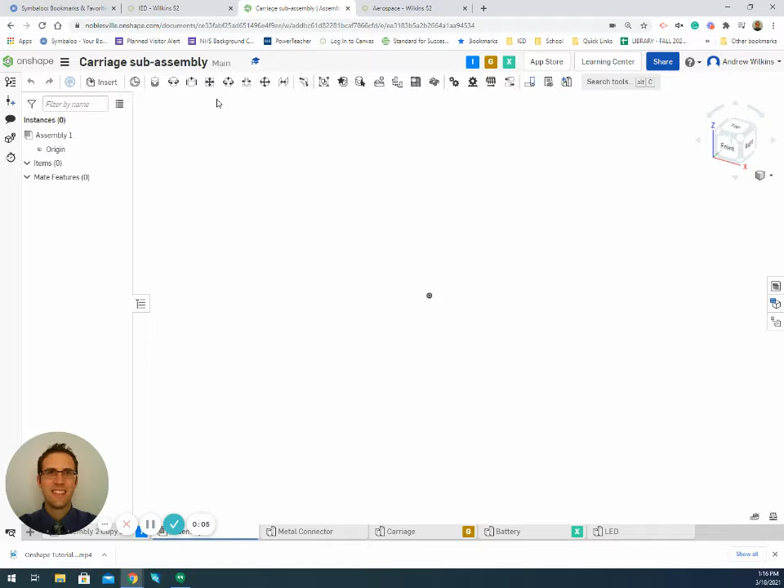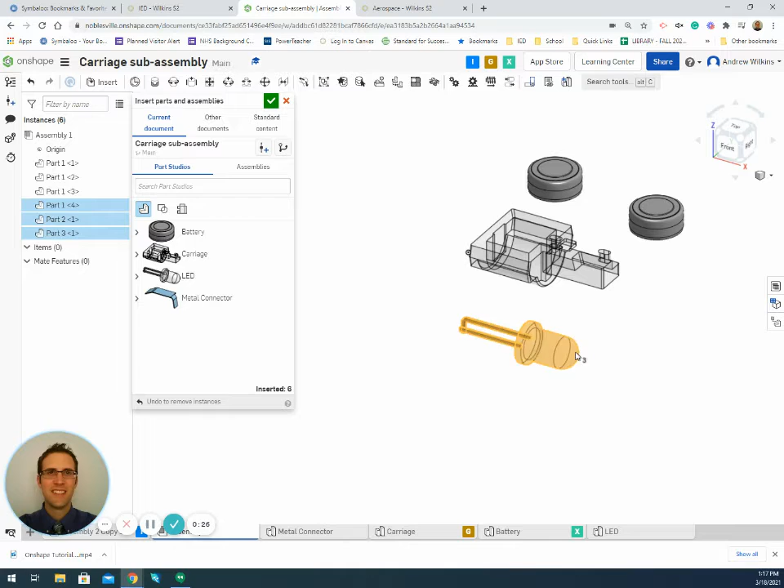Alright, so once we've started an assembly, the first thing we're going to do to get all these carriage pieces together is insert all the parts. So we've got the carriage, 2 batteries, the LED, and the metal connector.

Now I've got to hit the check mark. If I don't hit check mark, then they don't stay.

First things first, this LED that I created has multiple parts to it, it's not just one part. So if I try to move it, which I'm going to do right now, it separates off from the prongs. That's not good. So I'm going to undo that first.

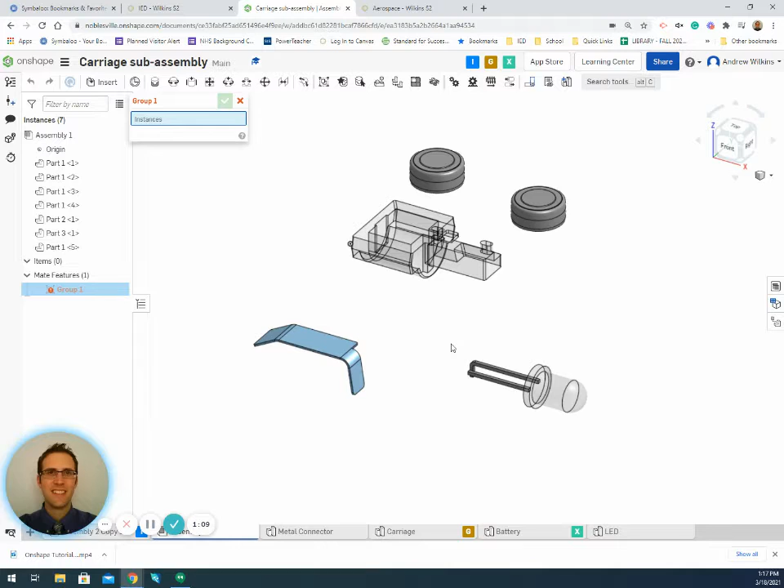And then I need to group this. You can do this with any set of objects that come in together, you can create them as a group. What it does when you create this group, it means those parts are going to stay in the same orientation to each other until you ungroup them or until you're done with the assembly. So I want all of those together the way they are. I'm going to hit check mark, and now my LED stays as one piece.

If I did that with all of the pieces, then all of the pieces would stay in that orientation they're in right now the rest of the time, like I wouldn't be able to move them. So I only want to group things that make sense.

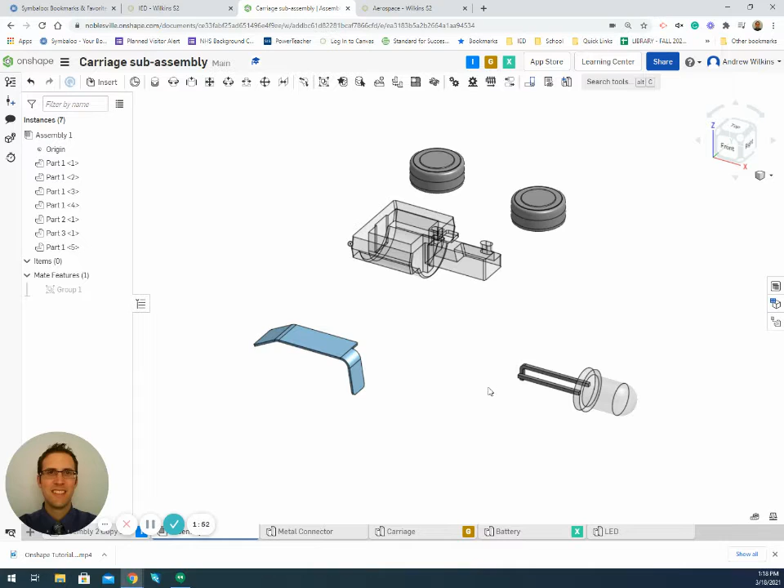Hardest part first or easiest part first? Hard part? Alright, the hard part first. That's the LED.

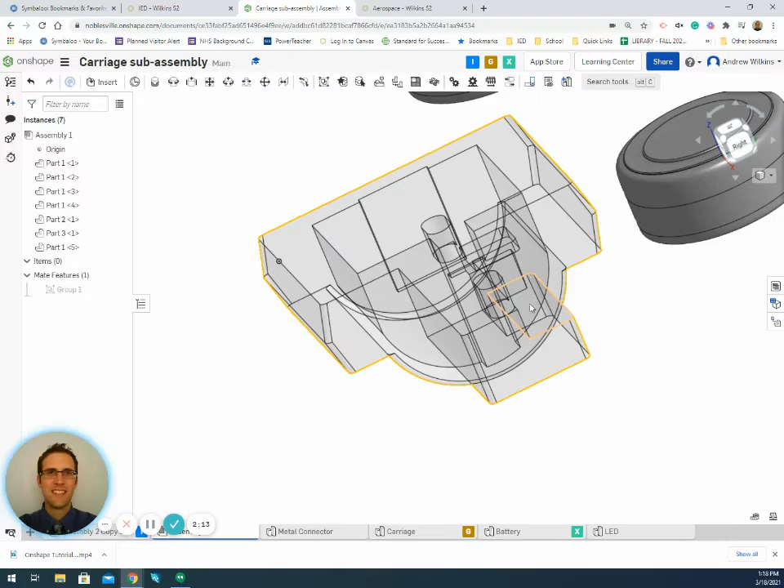So the LED basically works like this: if you look at those flashlights when you pull them apart, the smaller prong of the LED fits along this top surface of the carriage. The longer prong is along this lower surface of the carriage, and then the bent part of the lower prong goes in this channel right here so that it touches the battery. Alright, so that's kind of what's going on.

So in order for this to work correctly, especially since that LED is rotated a little bit, it's not perfectly lined up so that these two are parallel with the top surface, I'm going to use a tangent constraint.

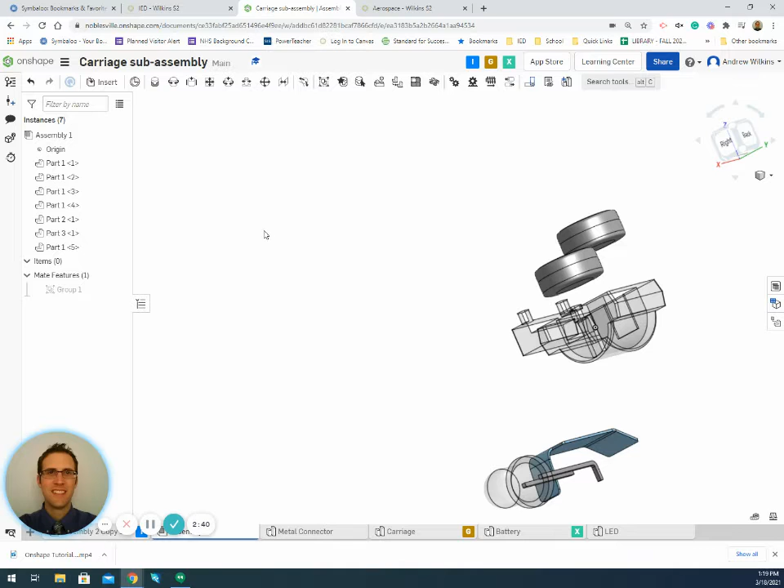So we haven't really done this before in this class. The tangent constraint is this one right here. It's a circle tangent to another part, and then it shows that you can move the circle around that piece. Alright, so I'm going to click on that.

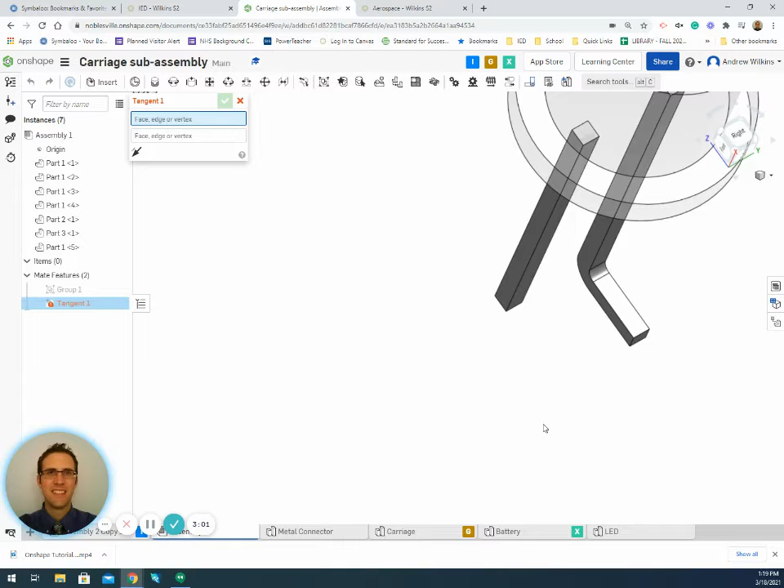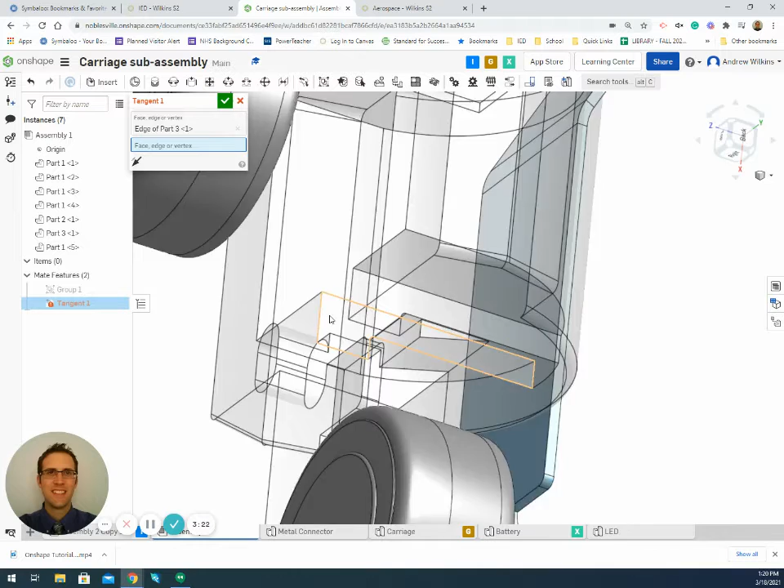And the first tangent I'm going to set up is that, and this is only by trial and error, okay? You're learning from my experience. So this edge right here is going to basically be limited by and ride alongside this interior wall right here of the carriage, so I'm going to click that as well.

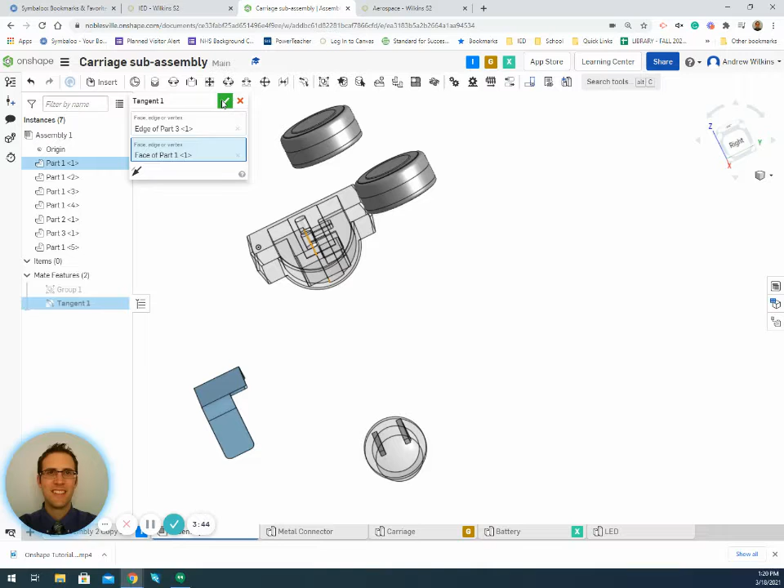So I clicked the edge and I clicked that, and now those two are oriented tangent to each other. Now right now it's like, oh, that doesn't really look like anything happened. And you're kind of right, because when I do tangent, it's not locked into this surface that's right here, it's locked into the plane that makes up that surface. So it can go anywhere on that whole plane.

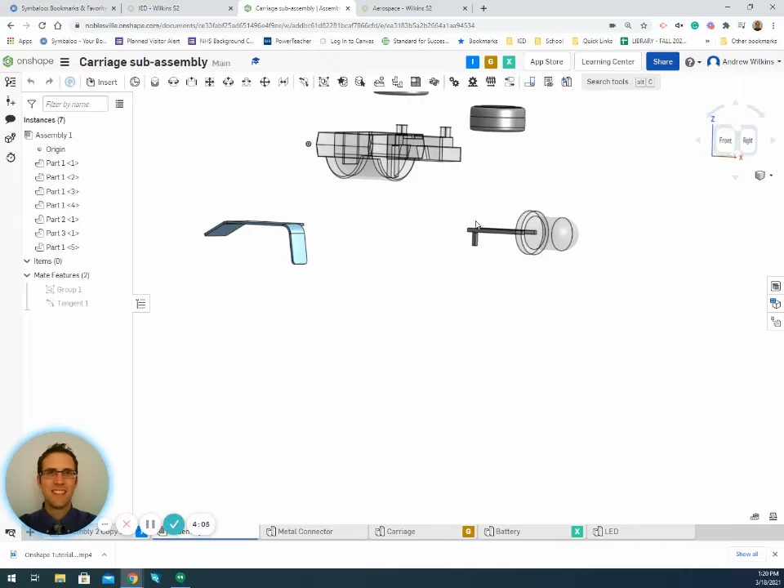I can move that edge. Alright, so if I were to literally grab this edge right here and move it places, it's moving all over the place, but it's staying tangent to that plane that that part was on.

Now, the other thing I forgot to do that's going to be really important is I'm going to fix this carriage in space. So I'm going to right-click and click Fix. That way the carriage doesn't move, and so I don't have the carriage moving every time I try to move something else. Okay, so that was my first tangent.

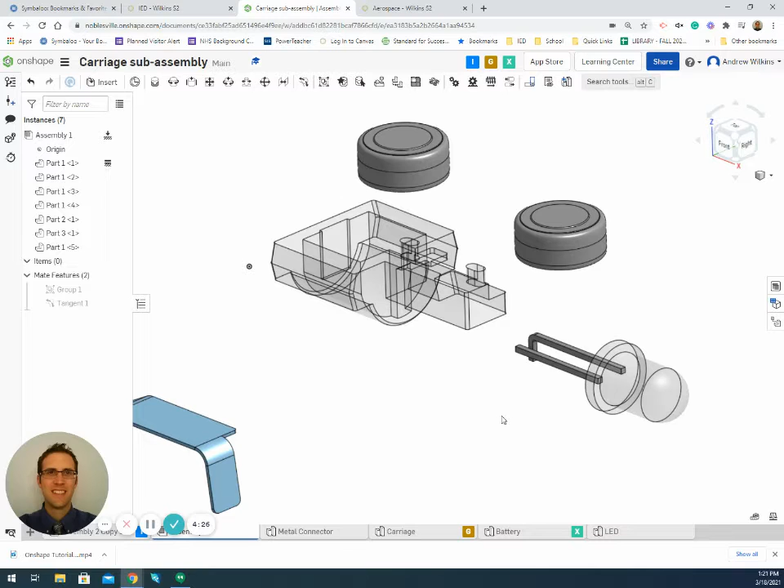Doesn't look like it did a whole lot. My next one is going to be, again, this is going to be rotated a little bit. So this bottom edge right there is going to rest on the top edge up here, so I'm going to do that tangent.

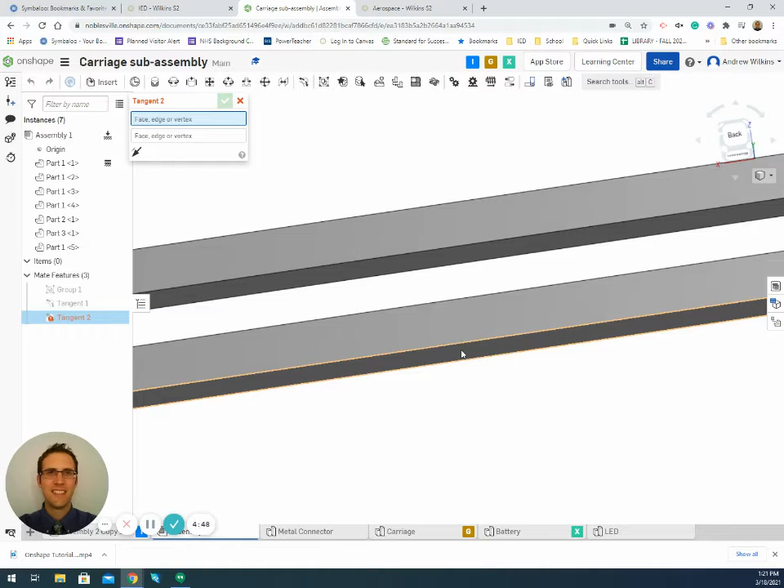So tangent constraint: this bottom inside edge of that LED prong is going to rest on the top surface of that. And once again, it's just making sure it's attached to the plane. So far it's doing what it's supposed to do.

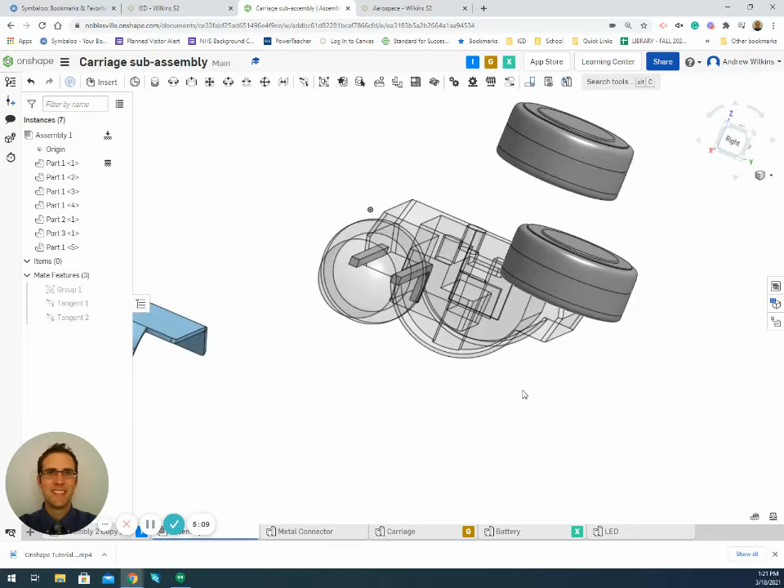Now if I try to move this, you see there's a rotation that starts to happen. That part's trying to stay tangent to those two things at the same time, so it has a little bit more limited movement basically.

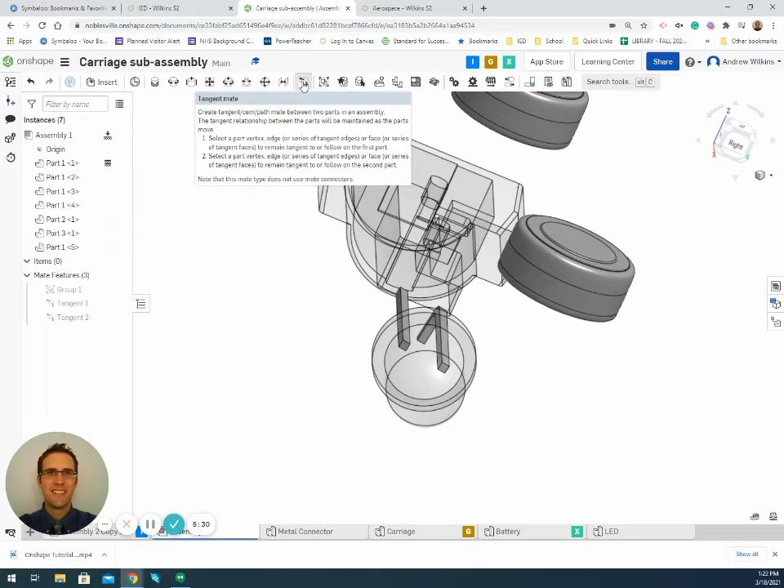So then the third constraint is another tangent, and this tangent is my outside bottom surface of this longer bent prong. So that edge right there needs to rest on this bottom edge down here.

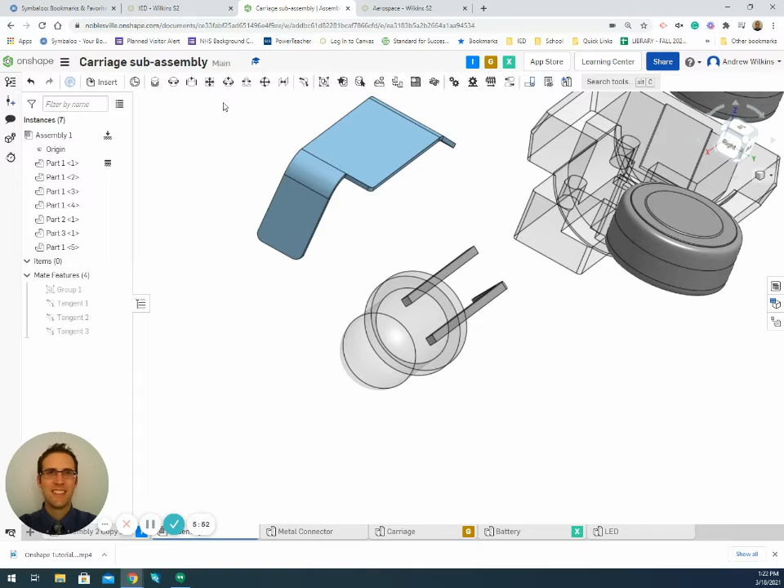I'll hit check mark, and now what you'll notice is that at this point, the only way this can go is forward and back. I can't really move it to the right or to the left. I'm trying to, but it's not, because it's lined up on all those surfaces.

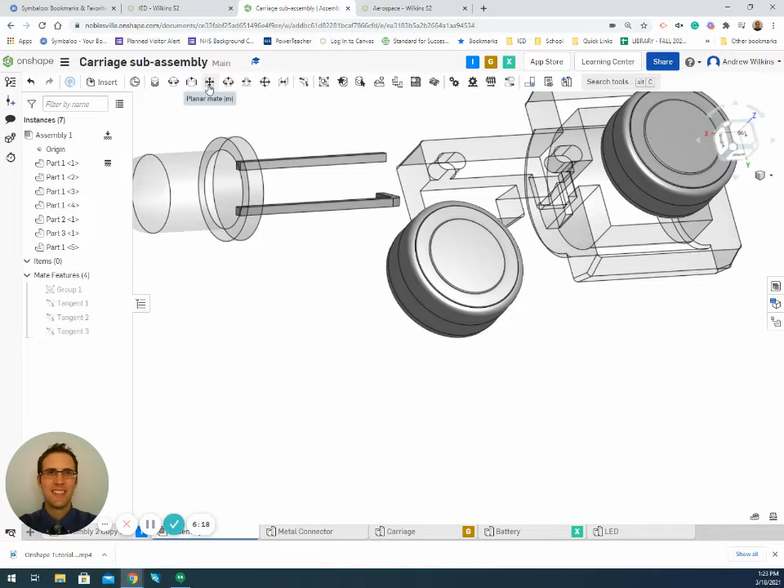So that's great. The last thing I need to do is make sure that this back end aligns with the front end of my carriage. So to do that, I'm going to do a planar mate, and I want the back plane of the LED to line up with the front plane of the carriage.

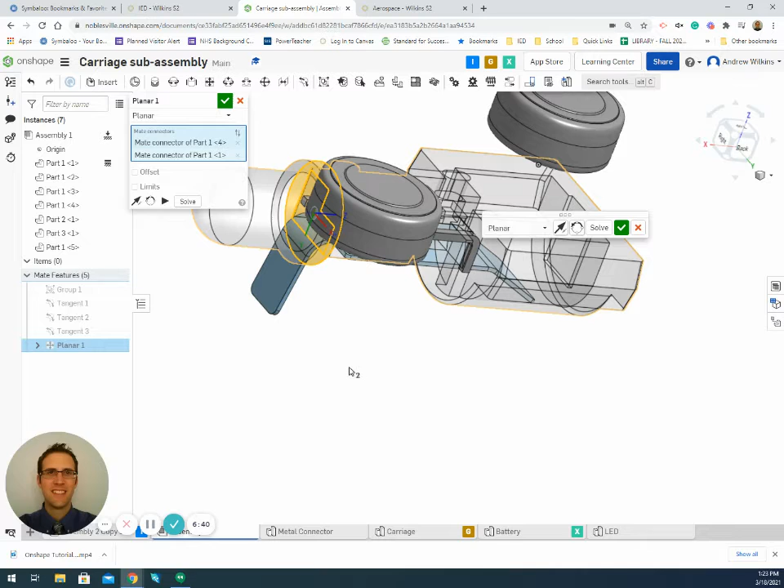Now when I first do it, it's going to drop it down there like I didn't have any tangent constraints before, which I totally did. See, they're all not really operating. But as soon as I hit the check mark, it'll recognize, okay, you had all those other constraints too. So now they're all in there.

That's the LED. Like I said, that was the most difficult one. That took a lot of me trying to figure things out.

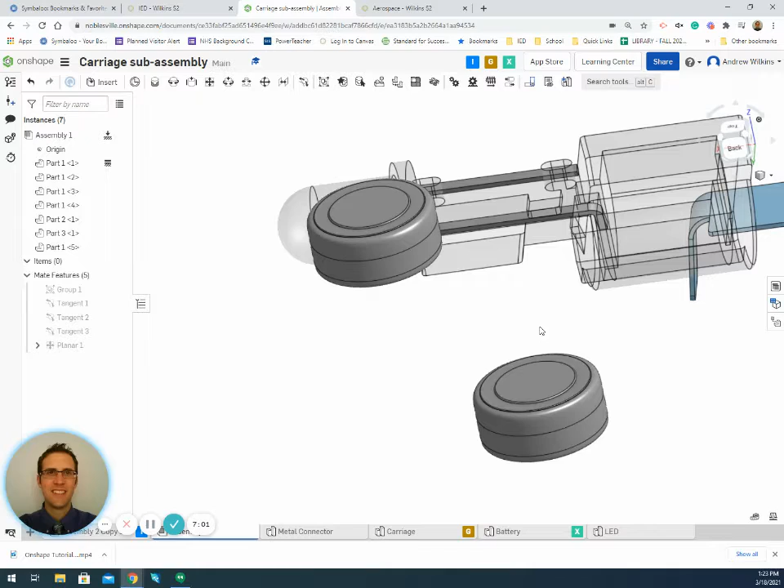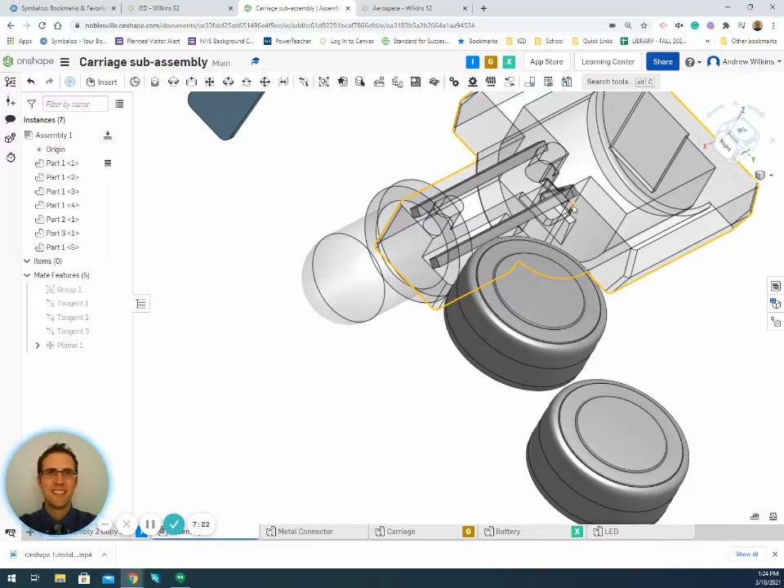What I will also say for that LED is that it's likely I would have to adjust some of the dimensions on it so it doesn't interfere or accidentally dip into the carriage. Right now it's kind of dipping into the carriage a little bit, and I'll show you how you can tell that more easily later during this. But for now, that looks really good.

So if I looked at that from this point of view, I'd say awesome job, and that's going to be good enough for what we're doing this time, for our project. But because I need to make sure things are really good, I worked on making them really good and making sure there is no interference.

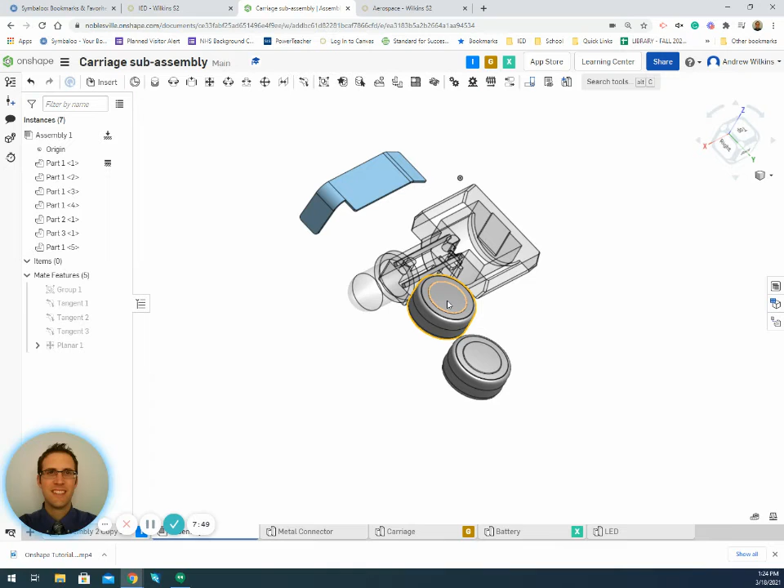All right, so batteries. If you pay attention to them, the smaller part, this part right here, is towards the front, and the larger part is towards the back of the carriage.

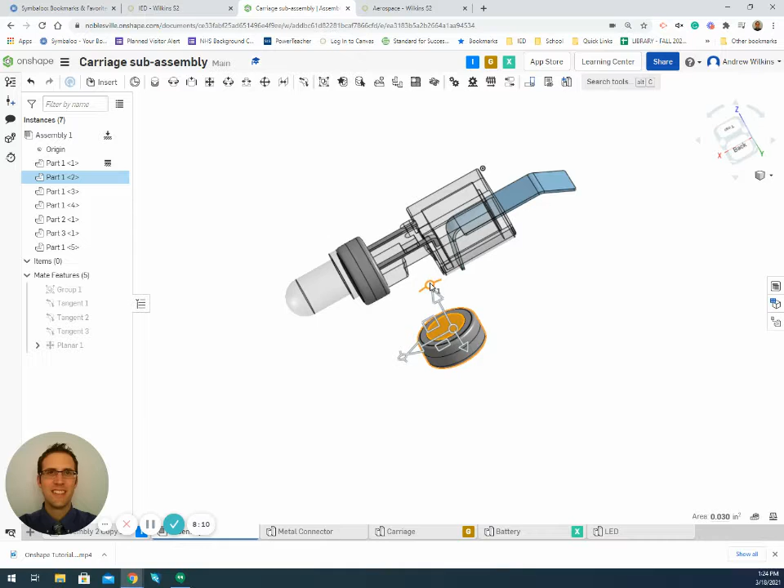So the first thing I'm going to do with these is click on them and reorient them so that they're set up that direction. That way when I go to move them, it's not as brutal when it's trying to set my constraints. So I move those, we're good.

All right, so for the batteries, what we're going to do is line up this first one. The first thing we're going to do is make sure it's all the way against this back panel. Not this one, because that's where the connector goes, but this one.

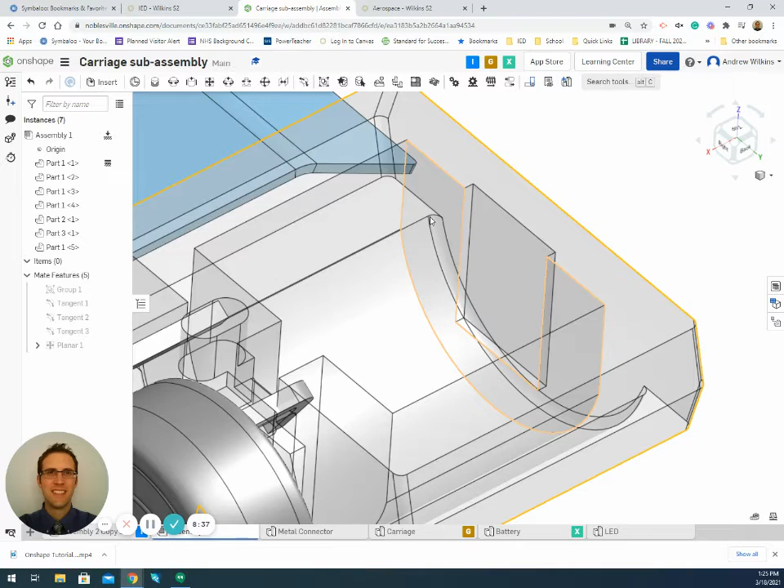So I'm going to do a planar mate on that. Planar mate, I'm going to click on this, and then I'm going to click on this. Now the reason I'm not doing a fastened mate is because a fastened mate makes the connectors perfectly aligned with each other, and I don't want that to be true.

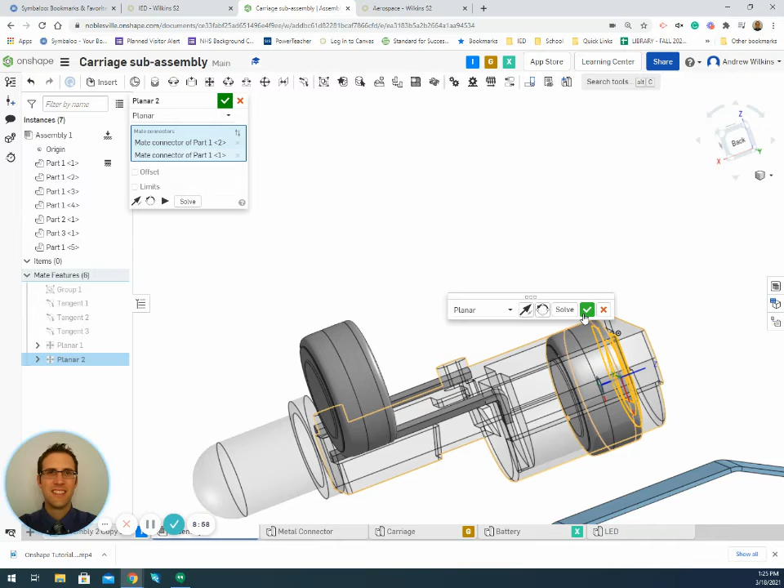I want this to be able to line up with the bottom of my carriage, and the only way I'm going to be able to do that is to make it a planar mate right now, which means it can go anywhere against that plane, even through the object. And then we're going to use the tangent again.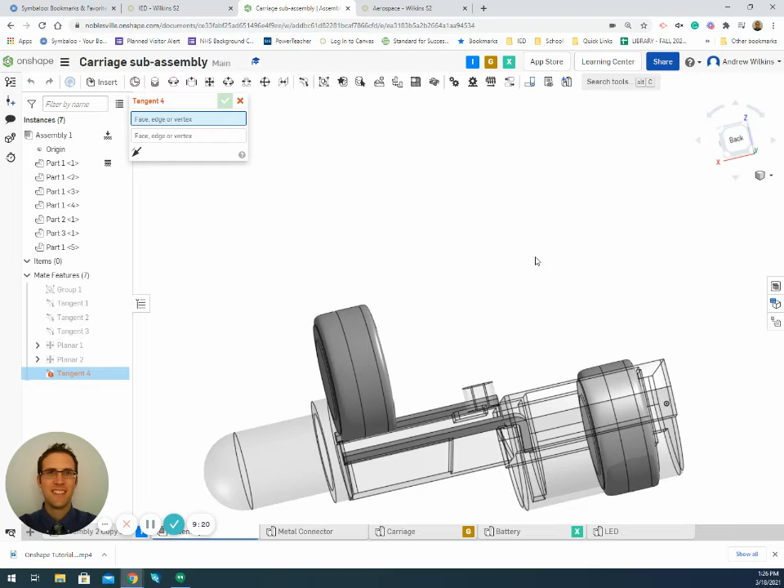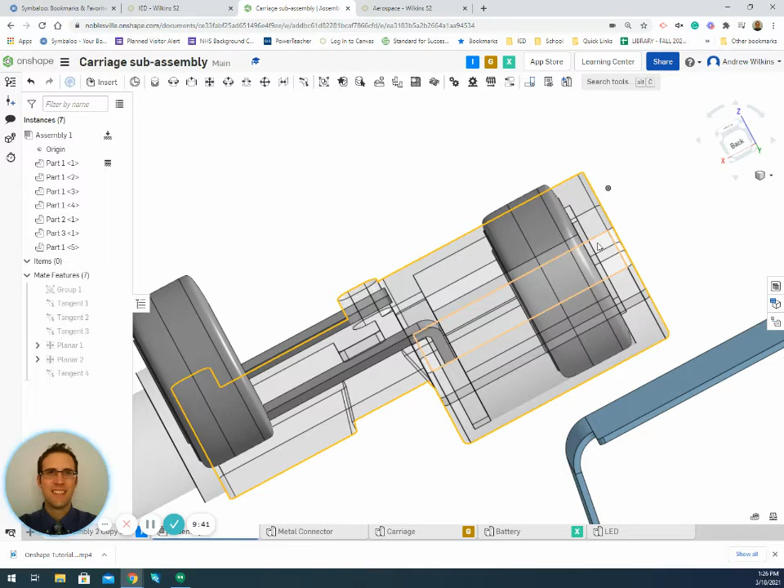So I'm going to go to the tangent mate, and I'm going to click on the part of my surface that's cylindrical, which is this part right here. I'm going to click on that surface, and then inside the carriage, I'm going to click on this bottom surface right here. So now, when I made those two tangent, it won't move off of this plane, and it also needs to stay tangent to that bottom surface. Well, I say the bottom surface, but it's the whole curved surface right here, so it has a little bit of wiggle room, but it's not really going anywhere.

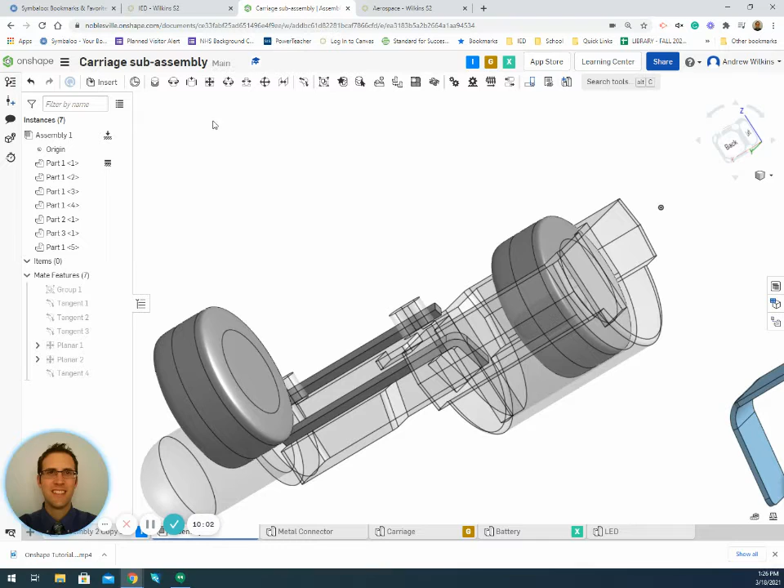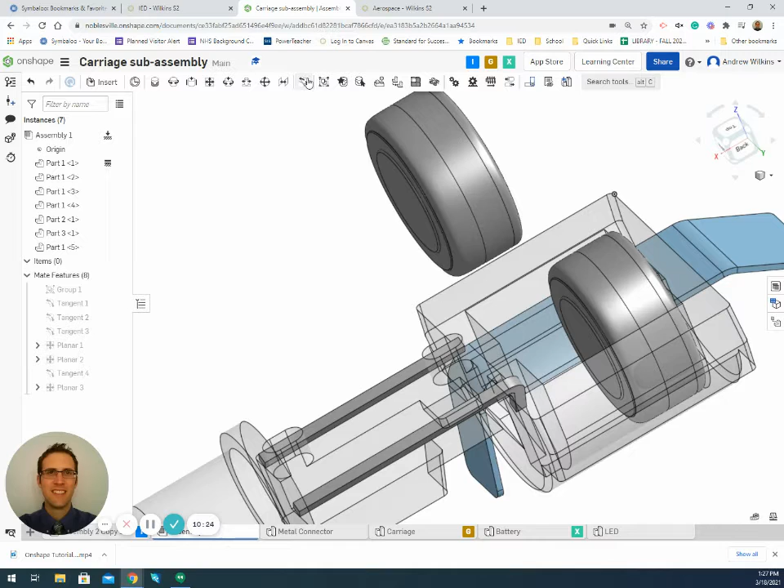All right, and then I'm going to do a similar thing with this battery. So for the other battery, I'm going to do a planar mate on, let me make sure. Yep, so that surface attached to the negative part of the other battery. Hit check mark on that. And then also make sure that I have a tangent constraint on that battery and the inside surface.

So now those two have, again, a little bit of wiggle room, but that's about it. They're staying there. If I look closely at my connector of the LED, it looks like it's touching that battery. That's kind of good.

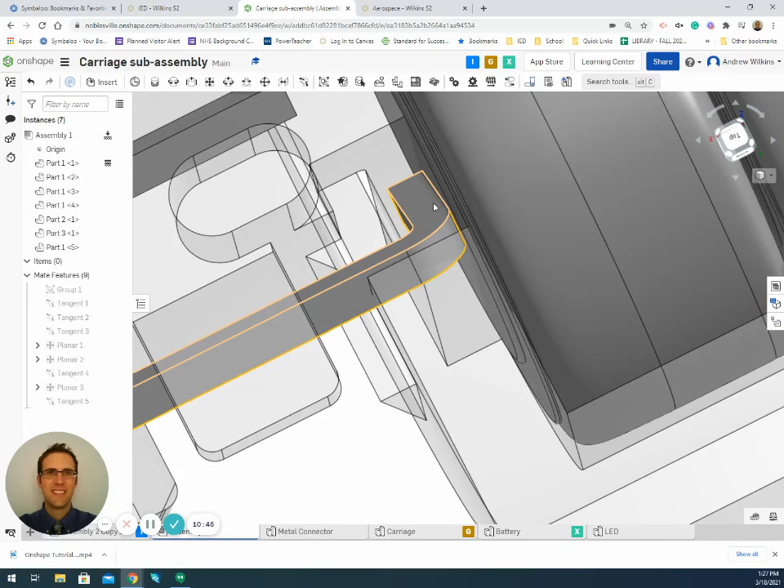All right, now some of that was I edited my battery to fit there. All right, so actually, or my LED, so I actually had to work a little bit on that.

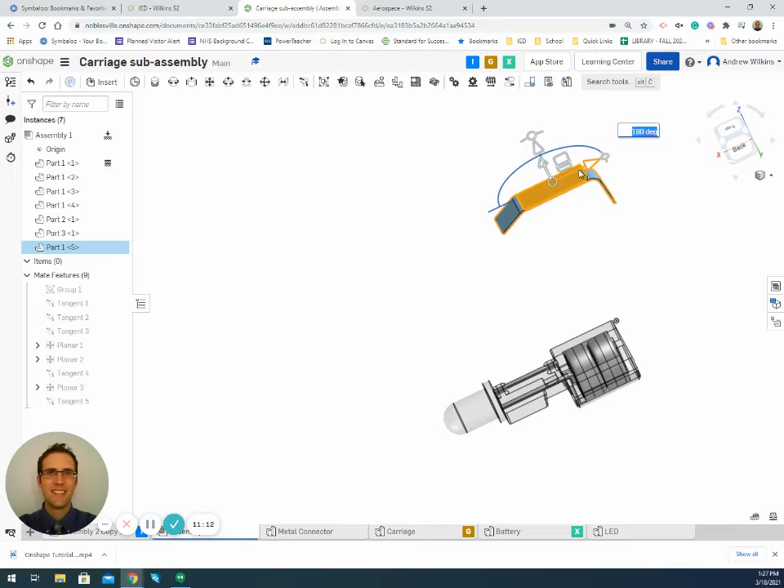All right, last one, this piece right here, metal connector. I'm going to rotate it so that it's oriented kind of the right way, like that. And then, sorry, I'm just going to do this.

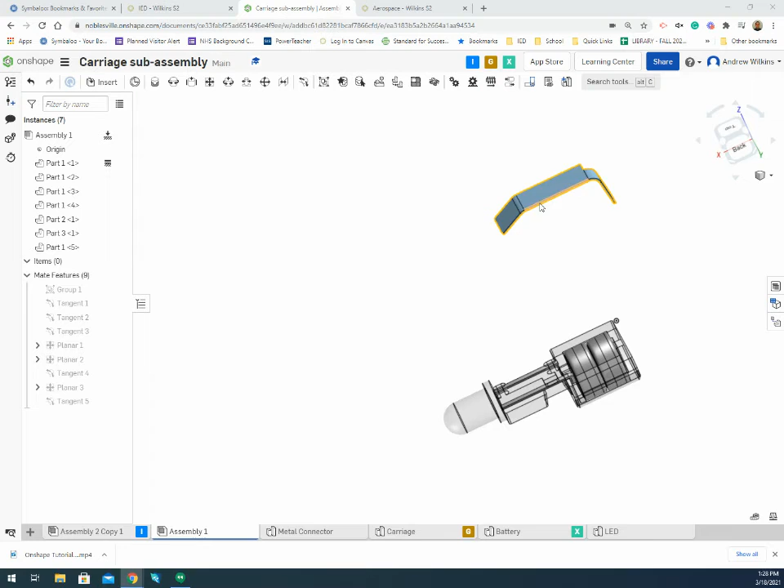All right, and so then the last part here, I want this to basically do what it does in real life. I want it to slide in that slot and be able to slide out of that slot. So I'm actually going to do a slider mate on this metal connector. So the slider mate is this one.

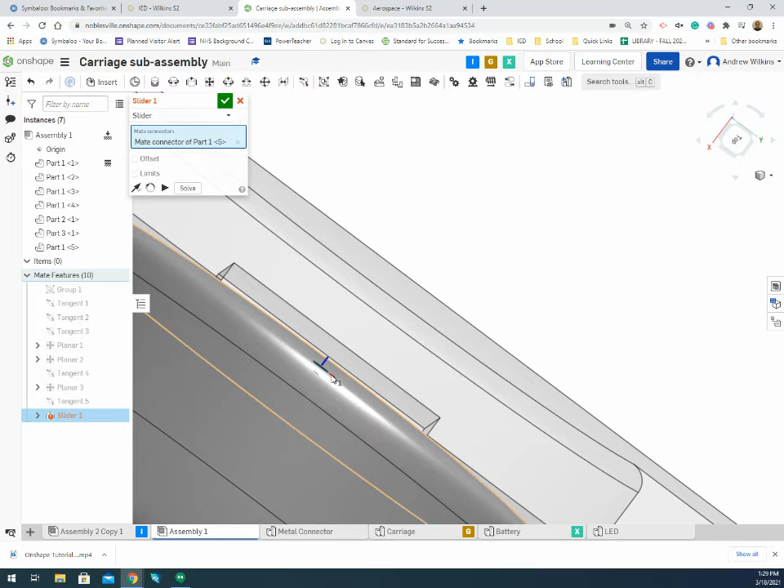And I am going to select the very bottom of this metal connector right there. And then I'm going to select, this is going to be the harder part, the bottom of that right there. So the bottom of that hole, make sure it's down there. Okay, so I'll hit the check mark.

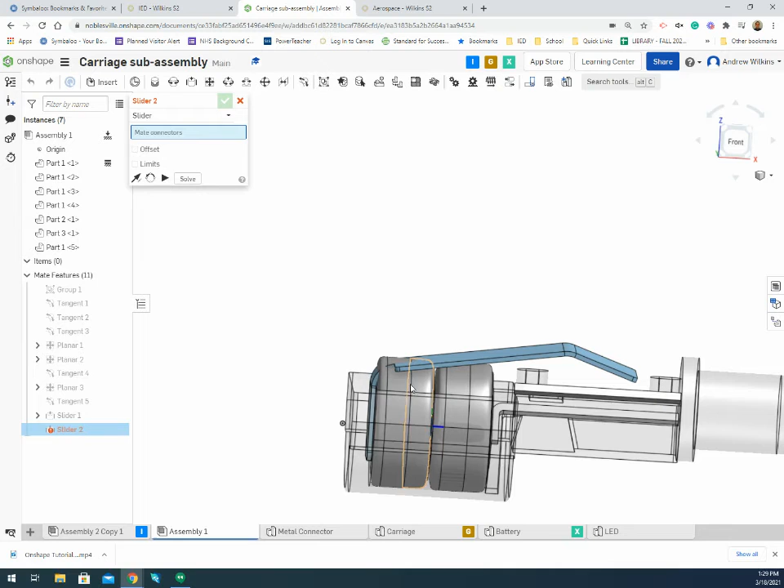Now, what you'll notice is that metal connector is going through the battery. Not quite possible in real life. Well, we can easily fix this, because we used a slider mate, right now this thing can go up and down, right? It can go all the way through the whole thing. Well, because of that slider mate, I can actually edit the slider mate that I made, and I could set some limits.

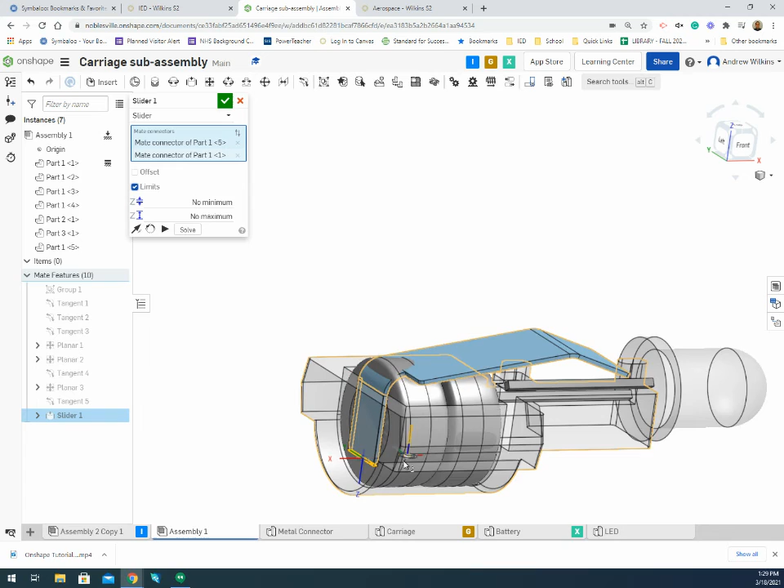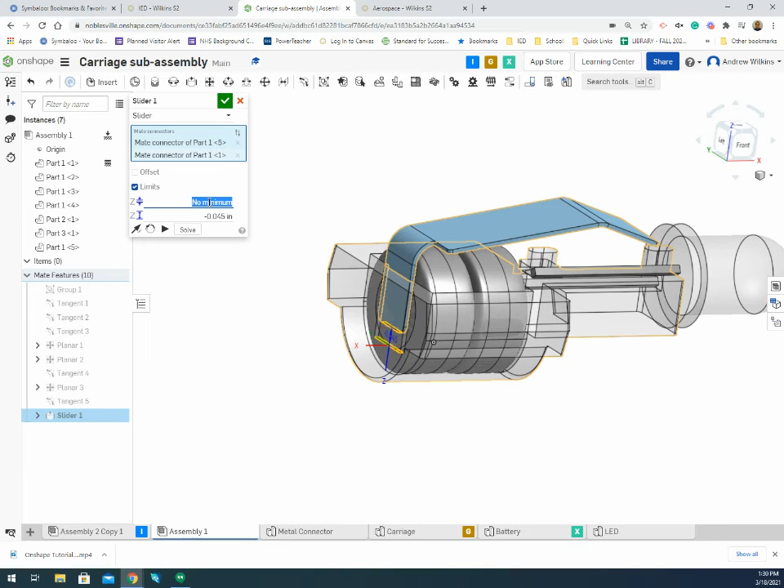All right, so this is my z-axis down here. I know it's kind of hard to see, but that z-axis, it's positive towards the z, and it's negative this direction. So actually, I want my maximum to be a negative number, like negative 0.045, for instance. All right, and that's the lowest it's going to go. Well, technically the highest because of the way everything's set up, but that's the lowest it's going to push into the carriage. And then if I want to make this like negative 0.2, for instance, that'll set some limits. And check this out, so now that's the furthest I let it go.

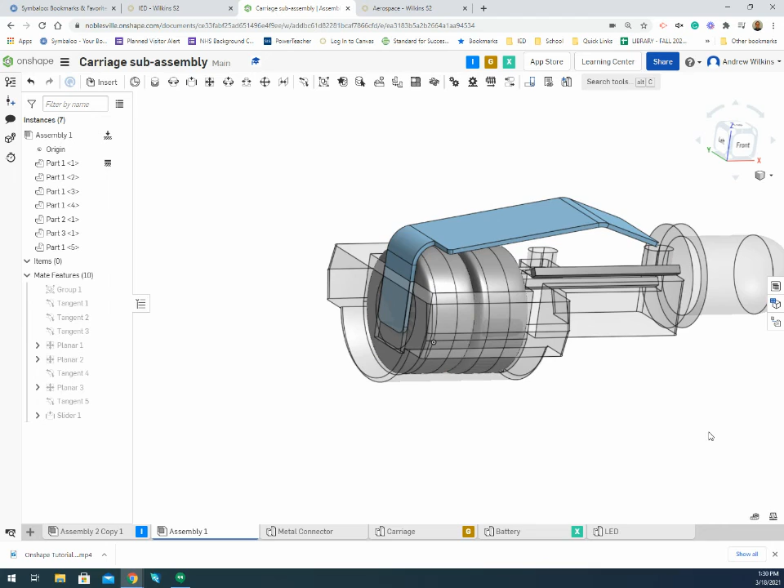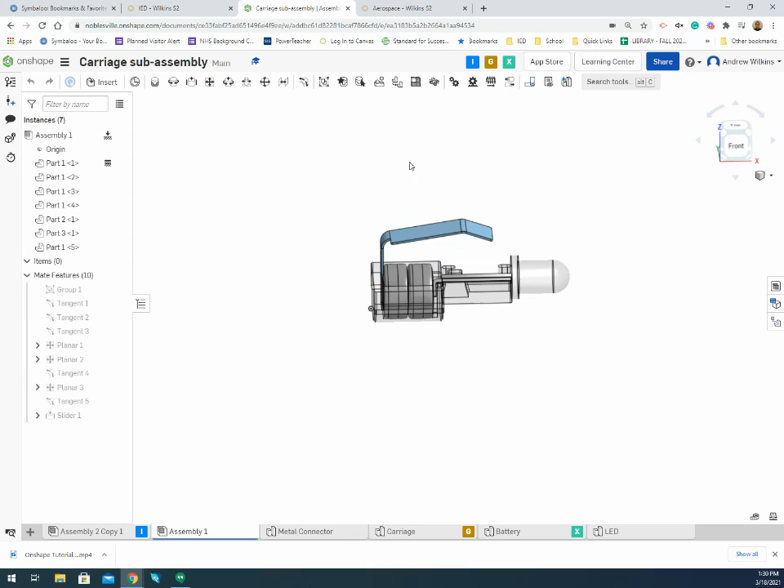Okay, now this will cause some issues when we go to put it in the case potentially. It depends on if we continue to make the assembly in here or if we make this a subassembly. If you make this a subassembly and you bring this whole thing into your main assembly, what it'll do is it'll keep everything exactly like that, so all that stuff's going to be locked together the way it is, which is probably how you want it. All right, but if you make the rest of the assembly in the same spot, then this will move basically. And so we just have to be cognizant that that will move and pay attention to what we need to do in the case.

But that's pretty much the whole carriage. All right.

So now, where's my, oh, did my video stop?